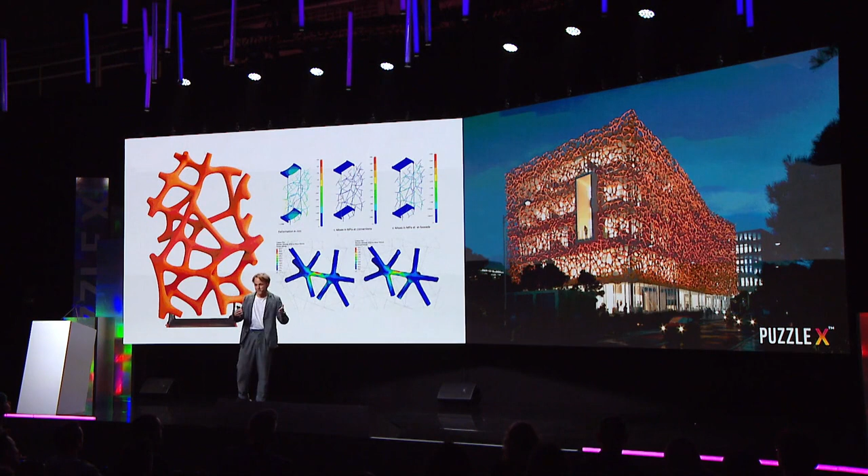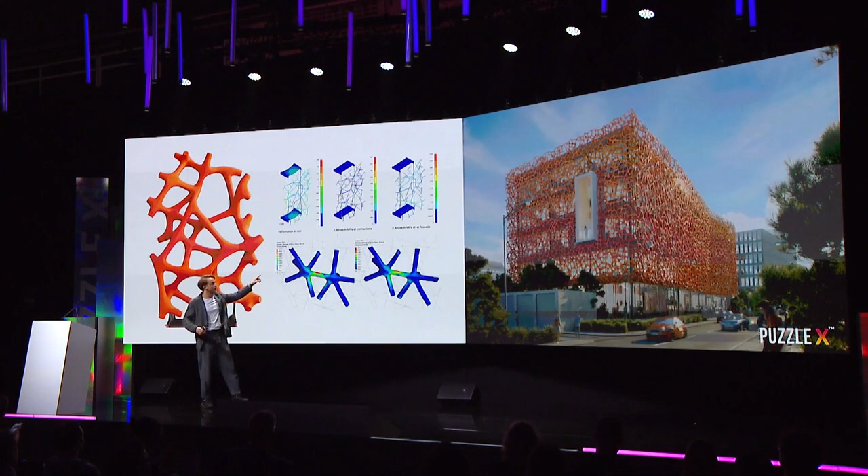Of course, a building like this is a rendering, it's right now in fabrication, would be needed to be calculated completely different. So we used technologies that you would actually find in rocket science, where you would basically additive manufacture parts of a rocket and would want the rocket to be as lightweight as possible and withstand certain load cases that you were not able to calculate by looking into a book and reading about formulas. So you would simulate the main load case and basically find out where your structure is the weakest, and then basically take off material that's actually not needed.

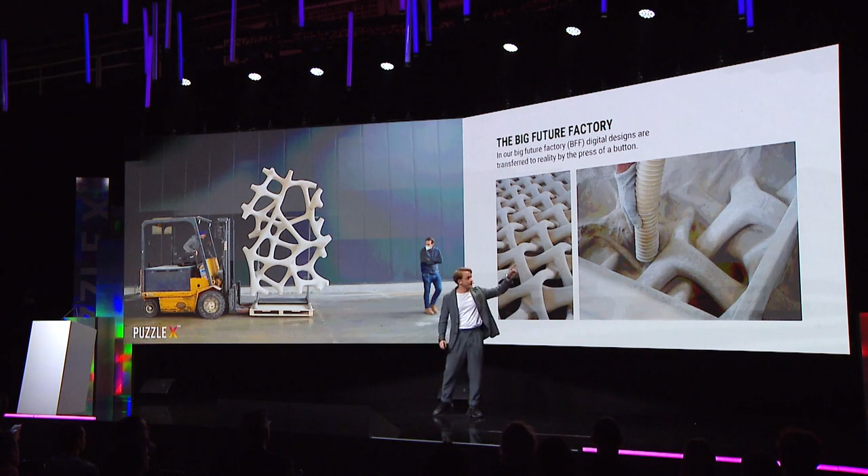So this is one of the first parts of this facade that we are right now producing. It's 3.5 meters high. It's roughly 1.5 meters wide, and it's roughly 40 centimeters thick. It's made out of ultra lightweight concrete, and it's produced in 2 hours. And we are doing this with a novel additive manufacturing method that basically uses a powder bed system and activates your cement inside the powder only locally where it's needed. The extra material is then sucked away and reused for later batches.

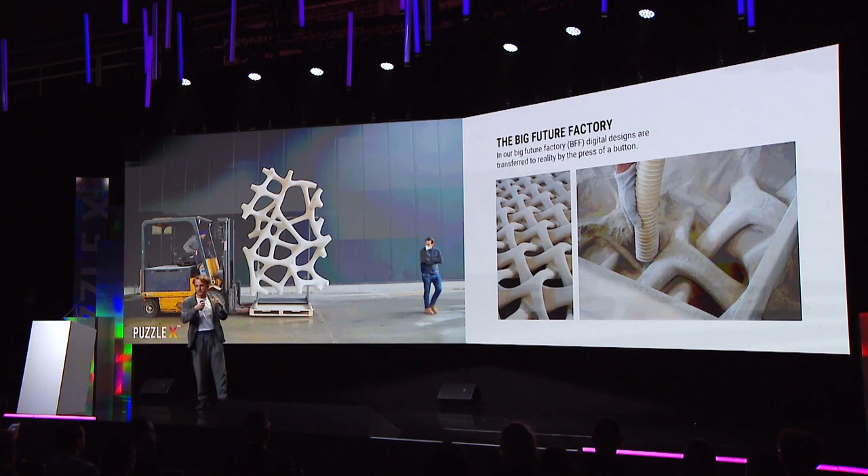And this material is ultra lightweight, but we also only use the material that's actually needed for the part to function as a facade. And there you, for example, have wind load cases, so it needs to be strong. It needs to also withstand the natural effects that happen outside.

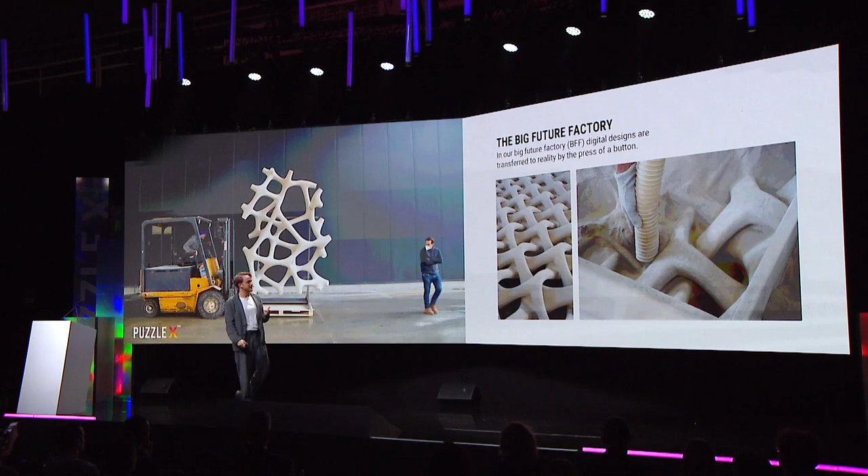Our company, Additive Tectonics, that you only saw in the beginning, was basically founded in 2020, so in the middle of the pandemic. And we really had a lot of time to focus on ourselves. And we built this hall, and we built this material mixing station, and we developed this new machine together with a construction machine developer. Concepts of this were already developed in university at TU Munich, and basically I brought these into industry.

And this machine is, as you see, the print bed is 4 meters long, 2.5 meters wide, and 1 meter deep. And a thing like this we can print in around 5 hours. So this makes this machine the fastest 3D printer on the planet.

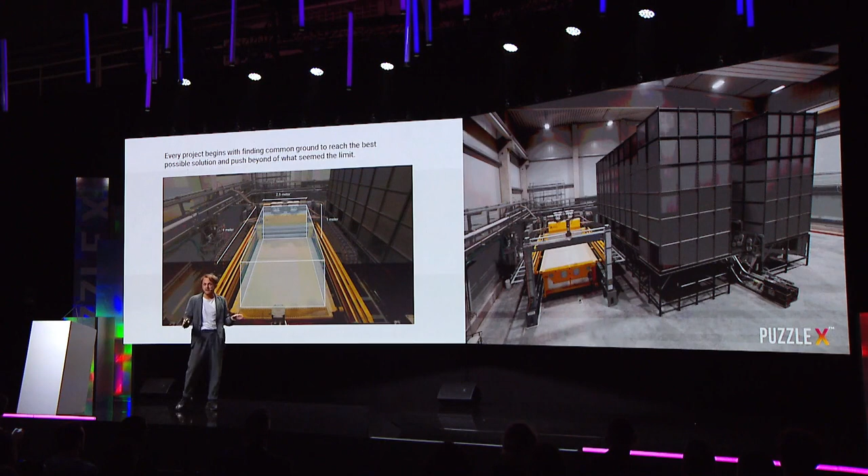But the most important thing is not just printing with concrete, because concrete is a resource that's not very sustainable right now. Of course, you could put these sustainability issues on the cement fabricators, because the cement fabricators are the ones that create this CO2 emission when they burn the cement in the very beginning. You could start to capture the CO2 and bring it back into your print or into a concrete part. But because they're not acting right now, we are looking actively to new material alternatives.

So we're working with geopolymers and magnesium oxide cements. This is like an innovation. We basically call this econit so that people understand that it's not a normal cement. And this type of cement can also bind wood, like wood chippings, brick, sand or limestone, or whatever works with your cement. So with that, we can actually print with wood and go further into natural resources.

We are right now also working on completely removing any binder out of the system and working with natural binders like fungi that can also work in these types of systems. Our most favorite cement is an ultra-lightweight cement, and this is actually made out of recycled glass, from a company that's right around the corner. We are in Bavaria, in Germany, so there's a lot of industry, and we can take this material from them because they're actually using

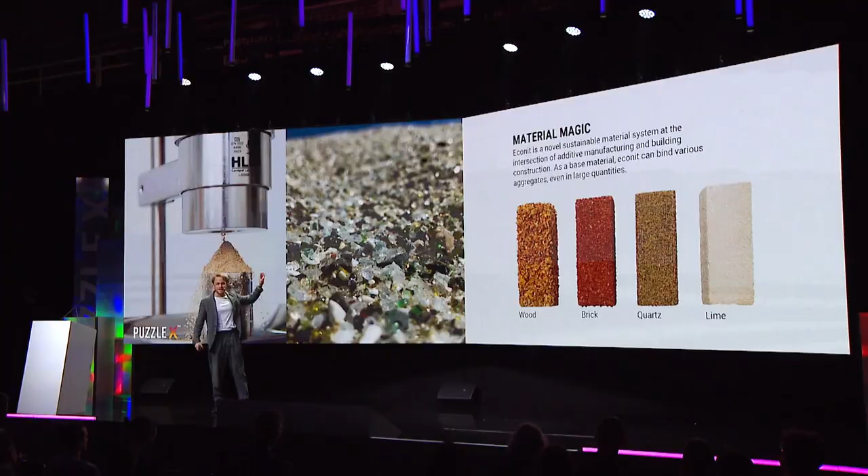recycled glass bottles. These are glass bottles that went through their life cycle like 4 times, and now they can't be used for the manufacturing of bottles anymore. And we basically use this material, inflate it, and make out of it a very densely packable powder that we then later use to print with.

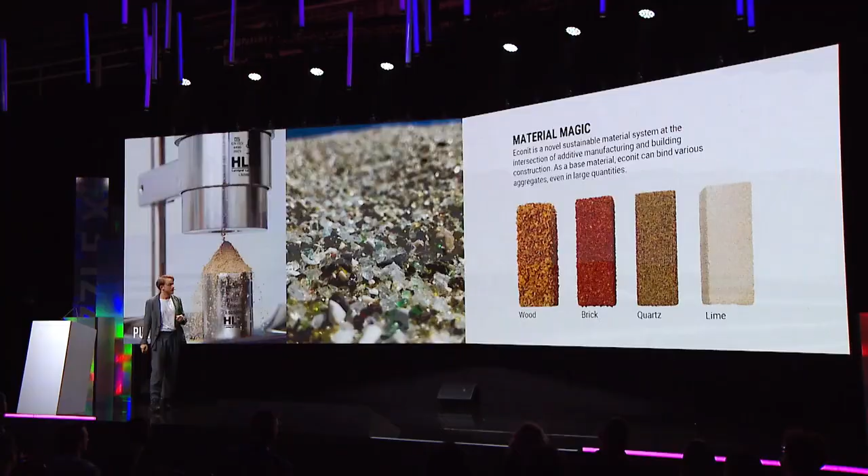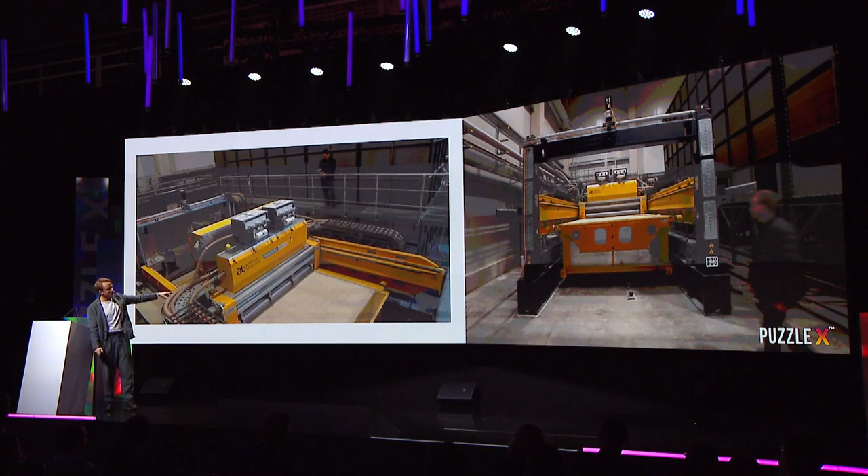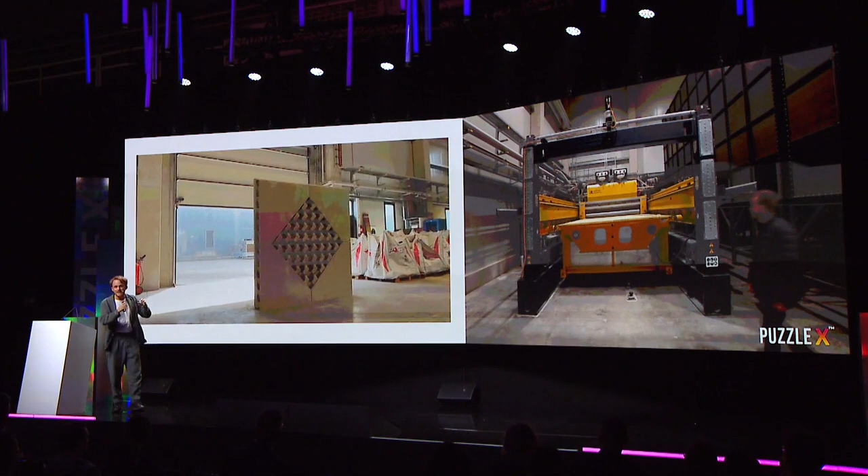Yeah, our printing system works like this. Basically, you have this container that you slice up, and then here you see the printer running. There you see how it activates the material locally, and then you can see that inside your part can be a completely different structure than outside of your part, which means the parts can be very complex and very delicate on the inside, and can be perfectly fabricated for your construction site.

You then basically take it on site, assemble it, and you can create not just a very novel architecture with it, but also a new expression and a new way of how we construct and how we think architecture can be. In a thing like this, all of your building services can be integrated. You can integrate your desks and these types of things.

Okay. So just to remind everybody what it's all about. It's not about doing only fancy architecture or making something that hasn't been done before. It's really about trying to break out of this monotony of modernism. It's trying to make less waste, because we can actually put a lot of building functions into an element that only uses one material. So that means you can recycle it later in a very elegant way.

We use less material, fewer people on the construction site, because on the construction site it just goes faster to assemble it, and we can actually handle the complexity that comes with digital building, because it means that you can't allow any mistakes to happen during your fabrication time. So we can actually take something out of a 3-dimensional model and put it directly onto the construction site.